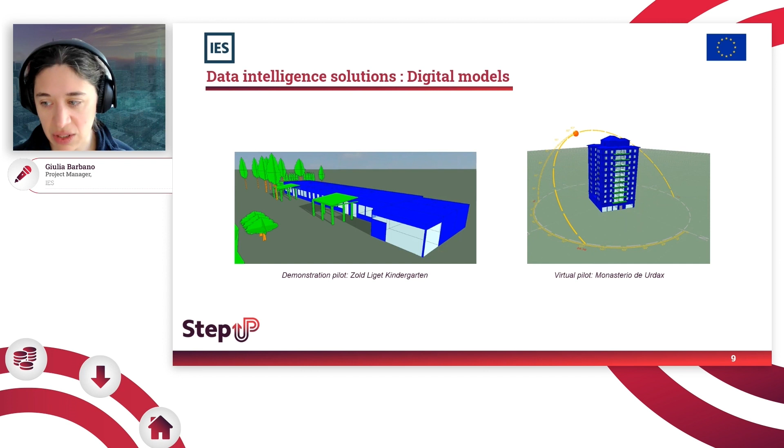Now, once the models have been built, we used data that we have collected on the energy consumption to enrich these digital models and accurately calibrate them, so close in performance to the real thing. And then that gave us the confidence to model the energy conservation measures and know what the expected savings would be.

Then zooming back in to the indoors and these room-level spaces. So this is then for the operations stage. We have looked at thermal comfort, which is an important aspect. So the renovation is undertaken to keep and improve indoor comfort, right? So what we did here was improve the prediction models for thermal comfort.

But the data collected could be compared with the actual room indoor environmental quality measurements at the same time. So we had on one hand teachers casting their votes and IoT sensors in rooms collecting temperature, air humidity, and so on. So these could then be used to carry out thermal comfort forecasting using a machine learning model. We have carried out some research on different models to be used, and through the project, the model has become drastically improved in accuracy.

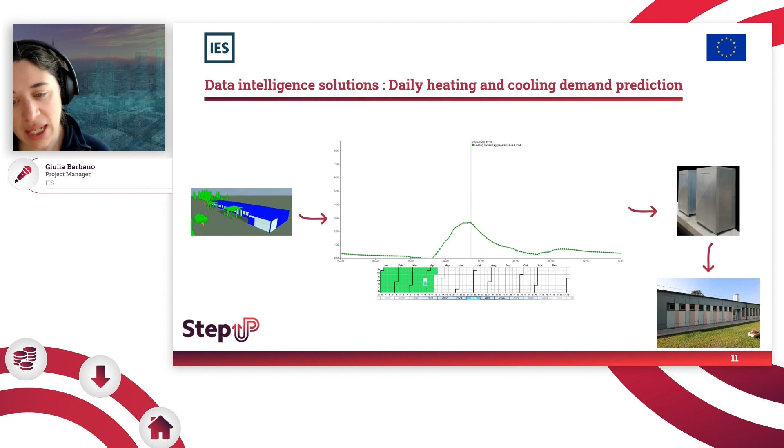Then finally, again in the operation stage, we are looking at daily heating and cooling demand prediction. So every morning, we run a simulation of the building at 7:30. This simulation uses forecast weather to predict the next day demand, and the data is passed on in iScan so that it is then available to the heat tank in the StepUP active system, and it's then used to control the storage in the building. So we have the digital twin that forecasts the demand accurately, and then it is used to optimize the control of the storage.

And in conclusion, the software tools and the platform for data collection developed in StepUP were used to generate the sound base to continuously measure and verify the renovation.

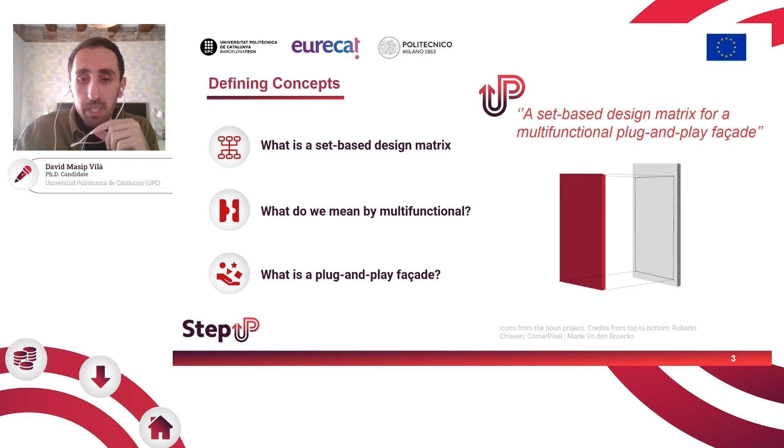So I was saying that the prefabricated system is the plug and play. It's meant to be designed for easy installation in the existing structure of the building. So once we saw all the concepts related with the presentation, I will go through the prototyping. I'm not going to explain a lot what is prototyping and the knowledge level behind it. But prototyping at the end is trying to provide a design that works for the end user. It's really common to use this classification made by NASA, which specifies the different levels of the prototype. The first levels are in the design phase, then levels that are more applied research or technology validated in a real environment, and then in a real construction or a real pilot.

So the prototyping at the end is to be sure that everything is working, or to test different steps. I wanted to also mention the plug and play protocol that has been developed. All the technologies developed in the frame of the StepUP project have been thought under these 6 main principles. Let's start with industrialization. It's one of the main topics implicit in the concept of plug and play. What we were trying to achieve was a system prefabricated offsite with really low intensity. Then we were trying to find a technology compatible with a really high degree of different geometries and different aesthetics. So this is why optimization was important, and also being compatible and interoperable with other technologies.

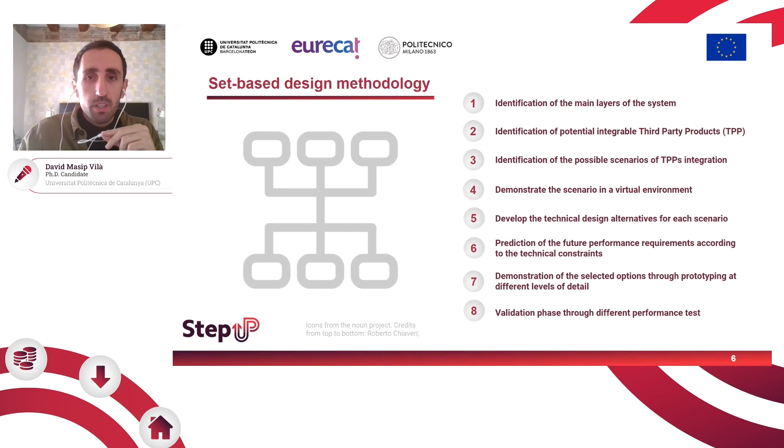So starting from the beginning, what is really important is trying to understand the system that we are going to install, or study in this case. In the StepUP project, plug-and-play technology has been developed, one for a facade system and the other for an active system. But this presentation is only focused on the facade system. So we focus on the cross section of the system. We started identifying the main layers of the system, which has been divided into 5 main layers.

One, the external layer; then we have the air gap between the external layer and the insulation. The third layer was the insulation and also the structural part of the system. Another one was an air gap between the insulation and the existing building. And then we have the 5th layer, which is mainly the existing envelope and also the structure of the whole building.

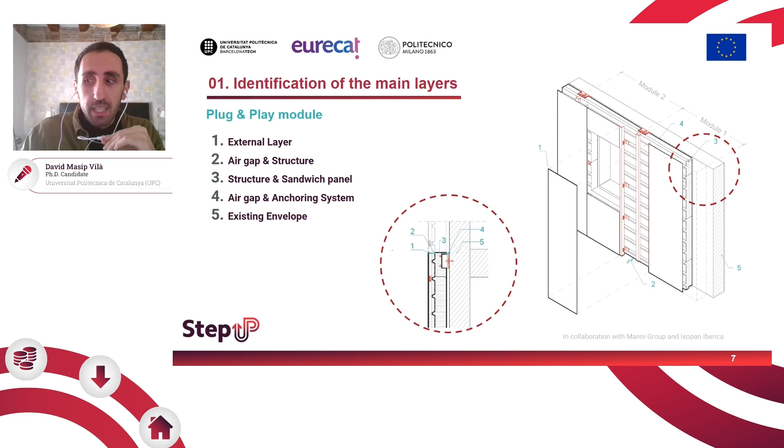Once we define these 5 layers, it's important to think about which kinds of products can be integrated into the facade system to give more multifunctionality. So we started grouping the products into two main groups: the ones that affect the passive systems of the facade, and the ones that affect the active systems of the building, and also the energy production. I will probably be repeating the word TPP, which means third-party products. It's what I'm showing in the slide right now.

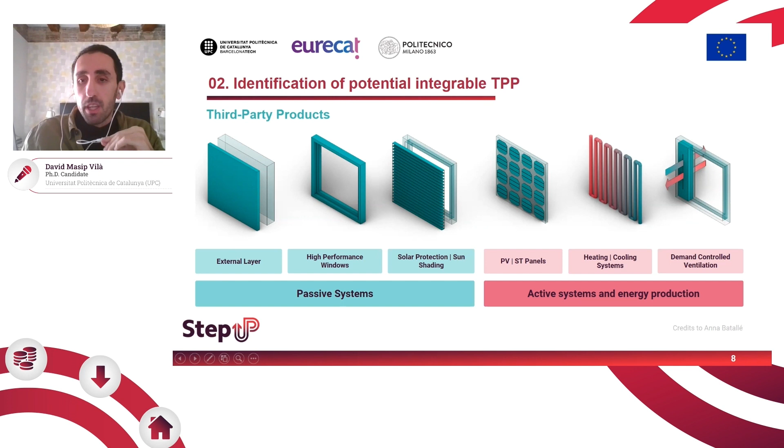Going through the passive system, we have the external layer. Here what we were trying to achieve is offering more options of customization to the final end user: different surface finishes, different colors, different sizes, different geometries. And also to include a high-performance window in the panel, solar protection, and shading. Talking about active systems, we have integration of panels, heating and cooling systems, and also demand control ventilation.

The third step of the methodology is the identification of possible scenarios. Here we have to think of the 5 main layers from the first step and the components that can be integrated, see which scenarios or third-party products can be integrated in each layer, and be realistic. For example, we will never integrate a window outside of the thermal envelope, for example in layer 1, so this scenario will be discarded. This is more or less what has to be done to understand which scenarios will be realistic.

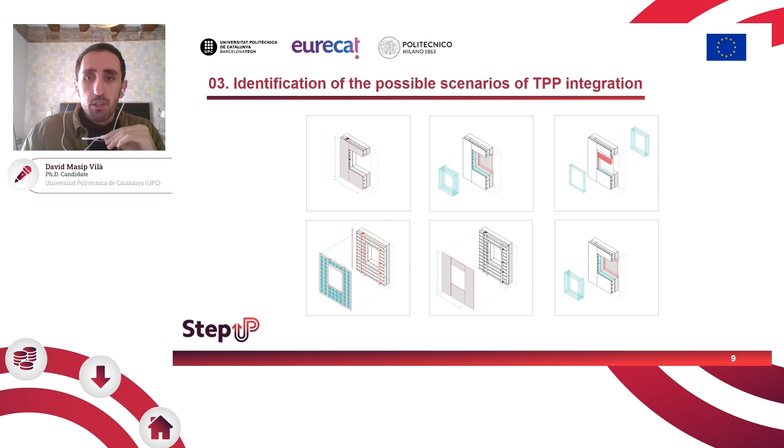And once we understand which scenarios we've got, we go through the demonstration in a virtual environment.

In this case, we work in a 3D software, trying to integrate the components inside of the model and trying to verify if it was making sense or not to include this prototype, right? Here I can show you a brief example of what is the integration, for example, of a blade on this kind of system, right?

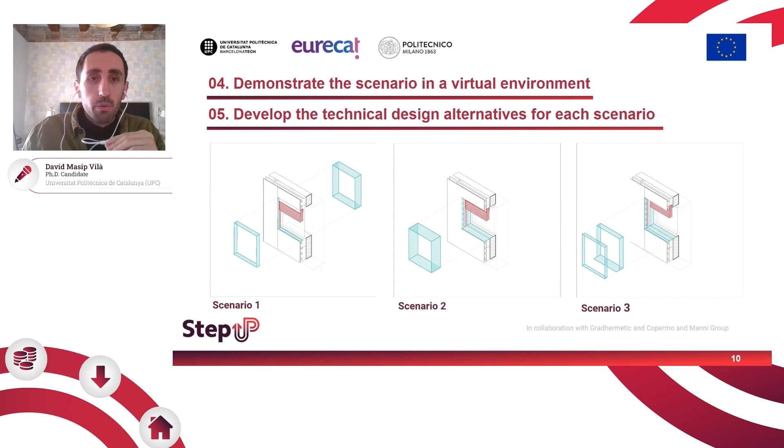And then the fifth step is to develop the technical design alternative for each scenario. So it means that if we decide to go through these two scenarios, which are the ones that we already detect in a virtual environment, we are going through to define the technical alternative for it. So how we do this? We develop this matrix to understand and to help also to understand which kind of requirements we will find once the product is already installed, right?

So the table is quite useful, starting from here, from the first arrow, selecting the third-party product that will be installed. Okay, so we have scenario one and scenario two in this case. And then the second one is the layers that I explained in the first step. So the layers that are on the system, in this case, in the plug and play model, right? So where will the third-party product be installed? So we're talking about the buildings.

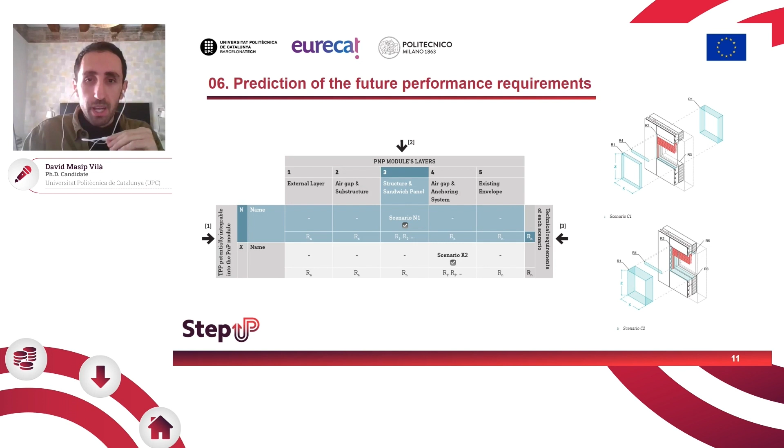It will be included in the first scenario in the third layer, which is the structure and sandwich panel, which is scenario one, right? And then also, if we're going to scenario two, it will be including the plinth in this case in the layer 4. So we get different scenarios, but in this case we have to start detecting layer by layer which kind of requirements are given by installing this third-party product in the layer, right? So this is more or less what we show here. It will be more detailed and explained in the presentation, and you will see also the examples.

But also, what is important here, because we are developing technologies for buildings, and there's a really huge scale involved in the project, the seventh step is the demonstration for the prototype. Here, we encourage everyone to work in 3 levels of prototyping. In this case, working in a preliminary prototype, which is done on a scale, mainly working in a laboratory, or in the facilities of the companies interested to collaborate.

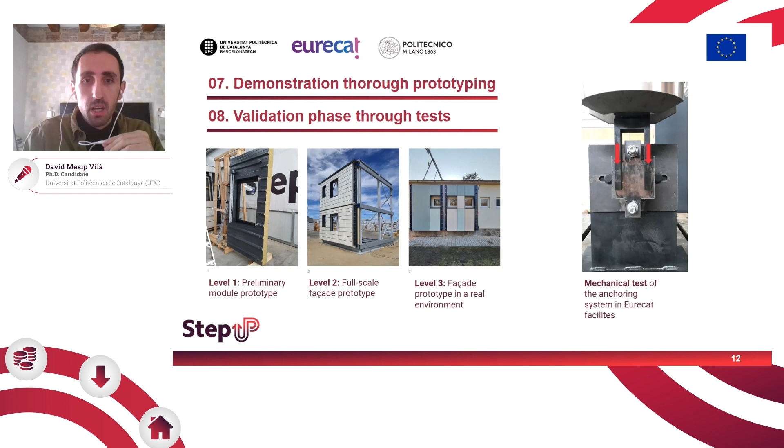Then the second level is working in a mock-up, for example, implementing the technologies in a scenario which is mainly similar to a real scenario. And then the third level of prototyping is in a real case scenario to validate the technology and also the system that has been thought. And then last but not least is the validation phase, where these kinds of systems, even if it's a complex system, need a couple of tests to validate that the system is working.